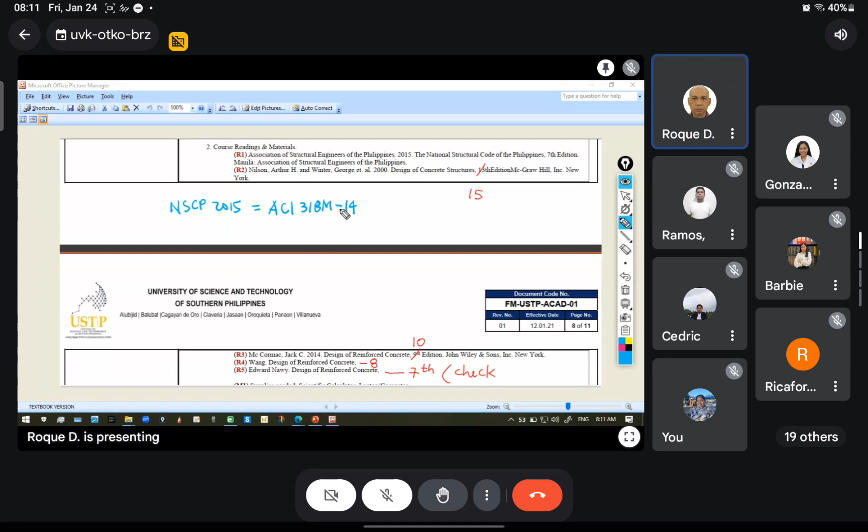So, by the way, I just want to correct the version. So, because our NSCP, so NSCP 2015 is equivalent to ACI 318M-14. So, of course, this R1, I think these five references are the top references in terms of RC. Yeah.

So that's why the textbook reference version that coincides with ACI 318M-14 for the Nilson book, so Arthur Nilson, Winter and Darwin, it's the 15th edition. Okay, so it's very far from. I forgot that the syllabus is a little bit outdated. So if you get the textbook, you get the version 15 that coincides with the ACI 318-14 and also NSCP 2015.

So you got lost along the way because in version 13 the numbering, the coding is different. So if you talk about like singly reinforced or doubly reinforced, the number of the section is different from the 14. So in order for you to not be confused. I missed this because I was rushing to give you the syllabus and I forgot that it is not updated. And also McCormac. So the top three textbooks are Nilson, McCormac, and Wang. So for McCormac, that is the 10th edition.

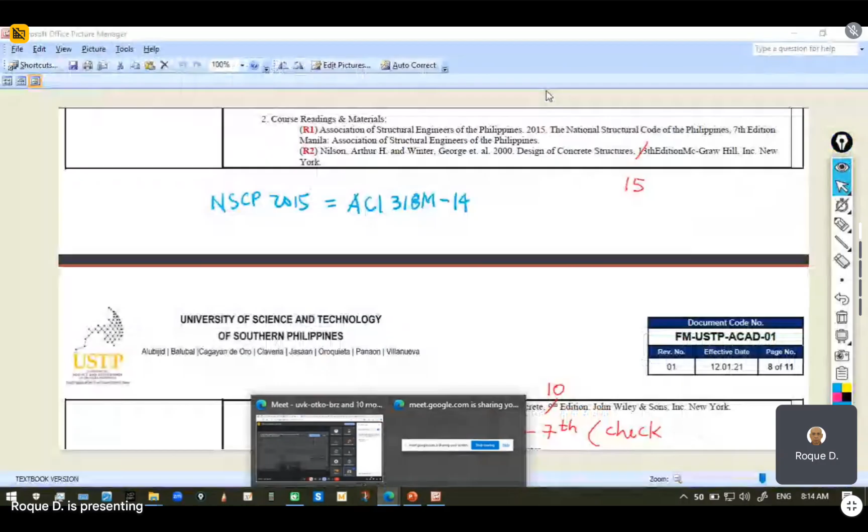And then the Wang. So the Wang looks like this textbook. So the Wang looks like this. So Chu-Kia Wang, Salmon.

And then for Edward Nawy, I think it is the seventh version. But what I got was a little bit outdated, but I checked. I think it's not yet available, or maybe it is, but it's very, very expensive. So you check if the seventh version coincides with the ACI 318-14, or the 2014. So if the date of publication of the book is beyond 2014, more or less that book coincides with the ACI 318-14. That's why our NSCP is 2015. NSCP 2015 used the latest during that time, that is ACI 318 2014.

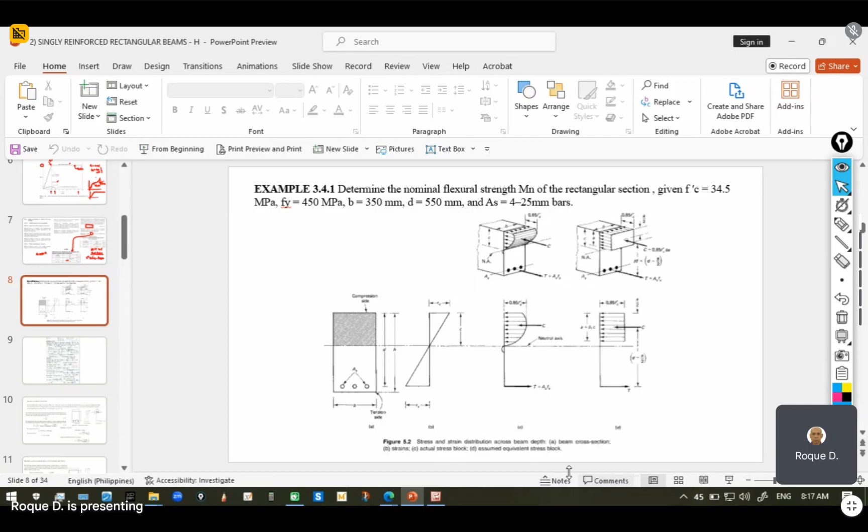So I got this from Nawy, but the only downloadable available, or maybe you can download a better copy, is this one. So you can see the width of the beam there. It's much easier to understand if you see it in 3D. You see? So you get the width of the beam b there. So this is the width of the beam, this one. And of course, the depth of the neutral axis or the distance of the neutral axis.

And then this realistic curve, as we discussed before, transformed by Whitney. And now you have the new variable a, the depth of the rectangular stress block. So I try not to write there. So it's very clear if you see it in 3D. So you have the steel area here, this part for the steel area. So it's very clear that C is just located in the centroid of the rectangular stress block.

Of course, we don't use this 3D dimension because it takes time. And also this one, we can forget this for a while. We can forget that one. And this one is our, I could say, governing diagram, stress diagram. And of course, this is our strain diagram. And this is our cross section. So don't forget, we always go back to these three diagrams: the cross section, the strain, and the stress.

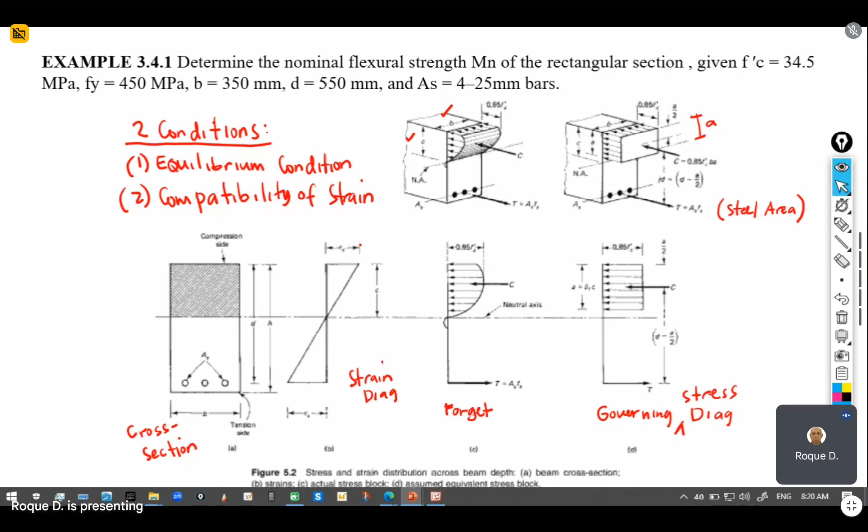Okay, so that's why, as I've told you before, in reinforced concrete we don't memorize formulas. We derive them. And of course, if you keep on solving, the formula will get into your brain. But if you notice, if you are trying to derive something, it will just take you maximum 2 minutes if you know the principle of equilibrium and compatibility. That's why in my undergrad, I didn't memorize formulas in RC.

Okay, so our first example is to determine the nominal moment. So you see that what is lacking in this diagram is the nominal couple, or we call it nominal moment. So again, from your statics, two forces parallel and opposite will create a couple. And in this case, we have two opposing forces equal to each other to maintain equilibrium. The condition of equilibrium must be satisfied, and that will be C equals T. And in that case, they will create a couple. So that is the nominal moment.

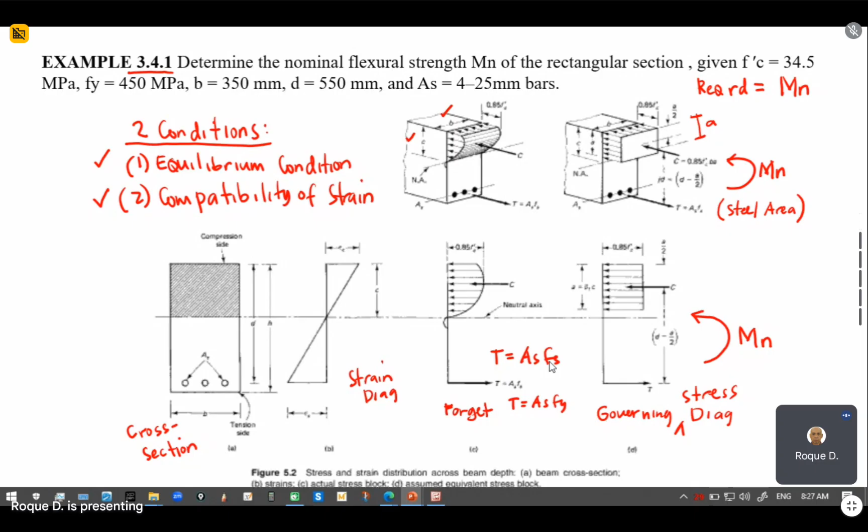So if it's equal to Fy, now we can compute. We know from the stress diagram that the compressive force equals 0.85 f'c, the stress, multiplied by the area. Again, the force is always equal to the area multiplied by the stress. And then we know that T is As Fy if the steel yields. So in this case, yes, it yields. Okay, it means the steel will give way.

I remember my instructor when I was taking this course in undergrad always said: if you cross the road at the pedestrian line, and you're a driver approaching a pedestrian line, then you have to give way. So that's another way of explaining yielding. That means that the steel will give way.

Remember, we model the steel as perfectly elastic plastic. Remember that? Then you got the Fy here, and then you got the strain epsilon. This one, the stress strain diagram. Starting from zero going to point Fy, the steel is in elastic behavior. Okay, so it's still elastic.

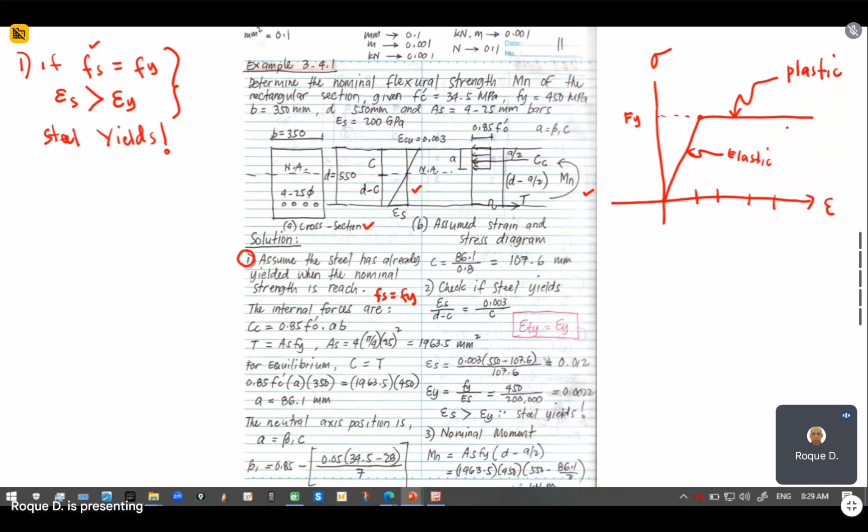And then when it reaches a certain strain such that the stress is equal to Fy, therefore the steel now is plastic. So no matter how you increase the load, the strain increases, but your Fy is still the same. Even though you increase the load and increase the strain, Fy is fixed. That is what is meant by the assumption that in reinforced concrete, we model the steel to be perfectly elastic plastic.

So we know T equals As Fy, and again from the first condition, the equilibrium condition, if we equate the two, we can solve for the value of the depth of the rectangular stress block. And now we can solve for c, the neutral axis, with a equals beta 1 c. But our f'c is 34.

So remember, beta 1 is equal to 0.85 if f'c is less than or equal to 28 megapascals. Since f'c is greater, you use the formula from the code, this one. Remember we discussed this in previous slides. Then you can get the value of beta 1. So beta 1 is below.

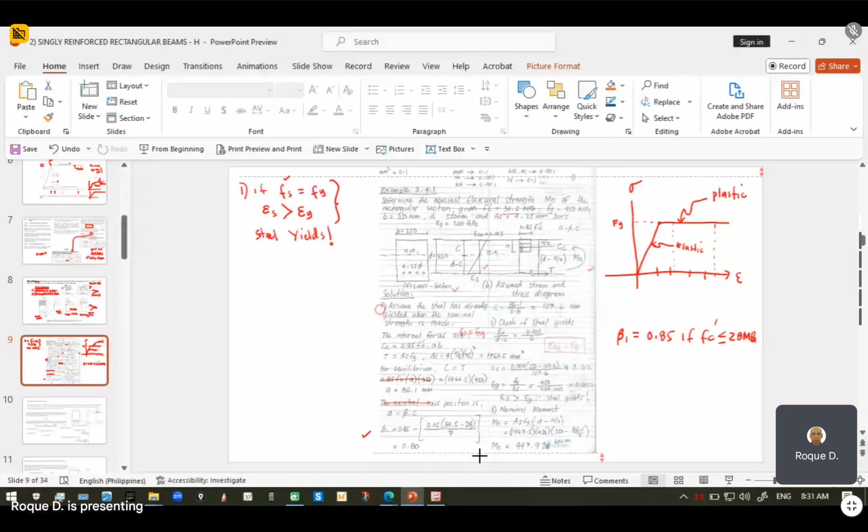Maybe I will... okay. Hope it will show up. Okay. And then now we solve for c. So we get the value of c here. Then check if it still yields. Again, we have to check if this condition is satisfied,

so that our assumption that Fs equals Fy will be true if and only if epsilon s, the strain of steel, is greater than the yield strain. So let us see if we are correct in our assumption. From the strain diagram, again, we go to the compatibility condition. Now, this is for compatibility. It's not hard to understand, because there are only two conditions.

Equilibrium and compatibility. So we know from the strain diagram, from the straight line relationship, that here is the small triangle. So we got epsilon s over the depth d minus c, and you also got the other triangle there, 0.003 over c.

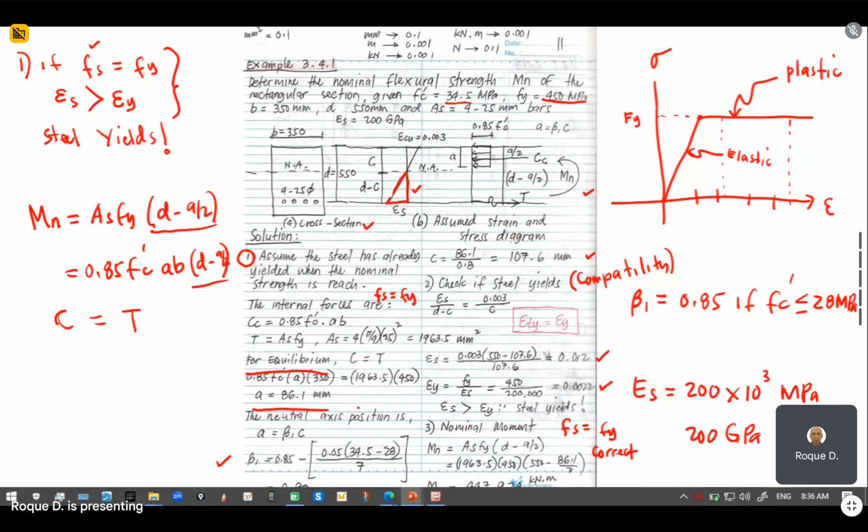So either you use this one, or you use this one. Okay, right? Because C is already equated to T, so it doesn't matter. Remember, your moment arm is still the same. The moment arm of the two forces, one couple. Okay, so that's our basic computation. So if you know the basic, you can move on with the most difficult one. So we have to establish ourselves with the basic, and then we go to the balanced strain condition.

So what do we mean by balanced strain condition is that your strain diagram is fixed. So it's not changing. It is fixed to, of course, epsilon cu, that's constant, and your epsilon s equal to epsilon y, or Fy over Es. So when this condition, that at crushing of concrete 0.003, the strain of steel equals the yield strain of steel, therefore you have what is called the balanced condition.

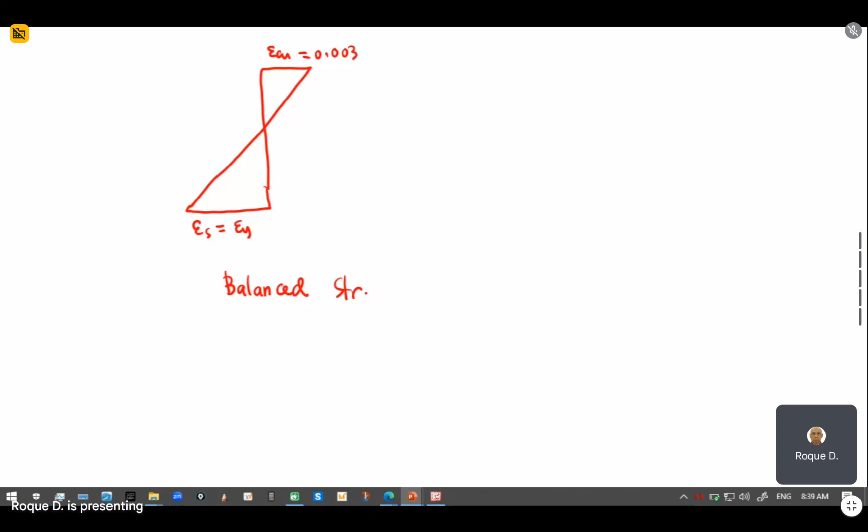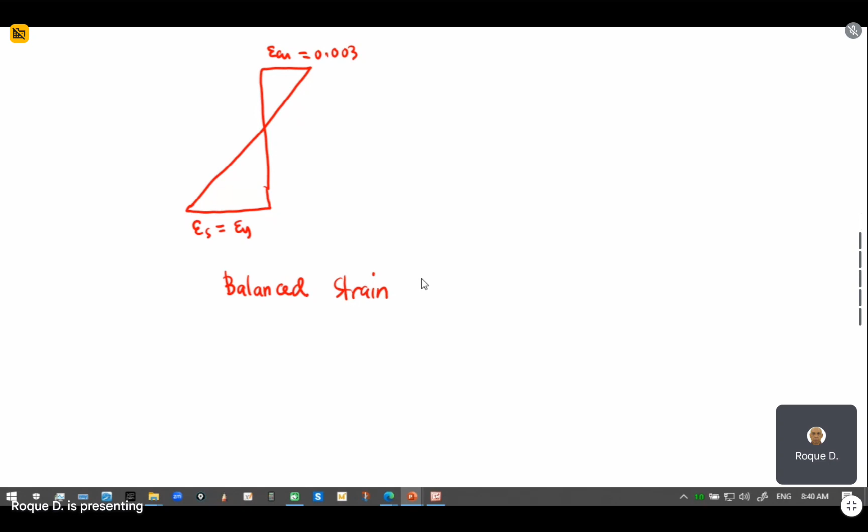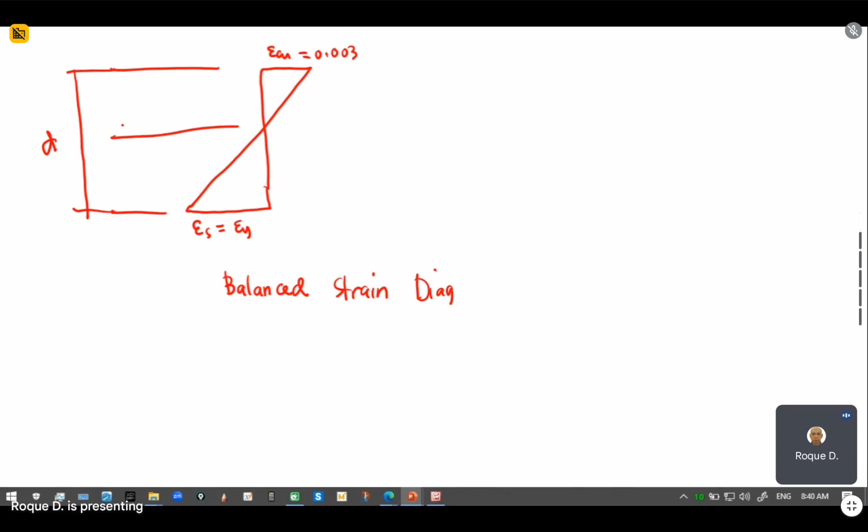Okay, so remember, if you have this, we have epsilon cu 0.003, and then we have epsilon s equals epsilon y. So we call this a balanced strain diagram, and you have this effective depth d, and you have this c, and then we have d minus c.

But if I project a line here, I will create a big triangle. So that will be epsilon s plus epsilon cu, or epsilon y. Such that this is balanced now, c balance. So if I solve for c balance, c balance all over, again straight line relationship.

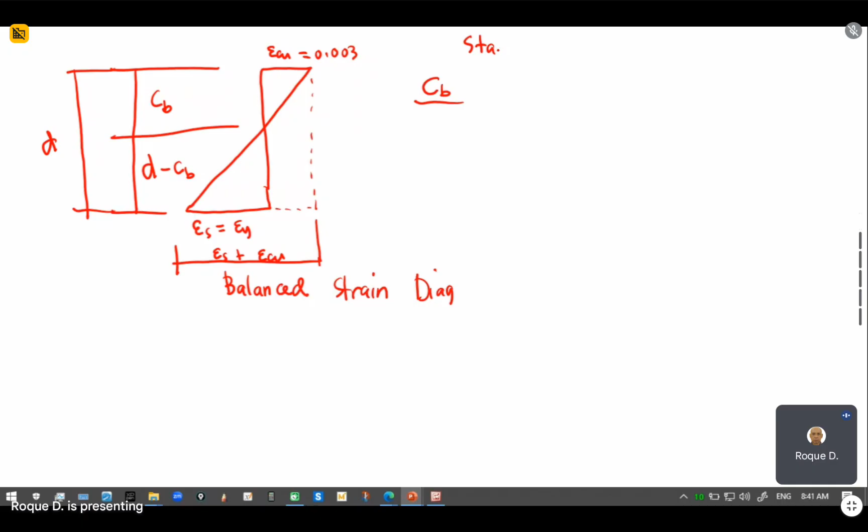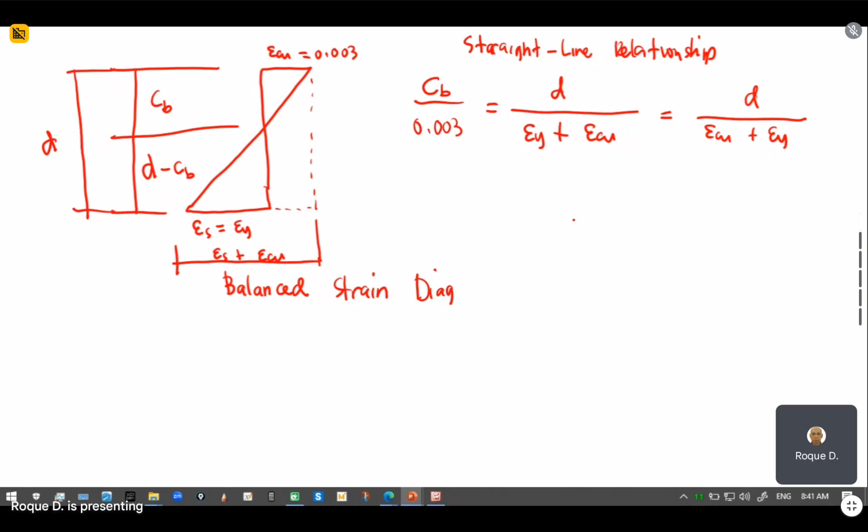So c balance all over 0.003 epsilon cu, and then you get the big one. So that is d over epsilon cu plus epsilon y. Again, epsilon s is the same as epsilon y. Okay, or let's rearrange: d epsilon cu over epsilon cu plus epsilon y. So this is what we are getting here.